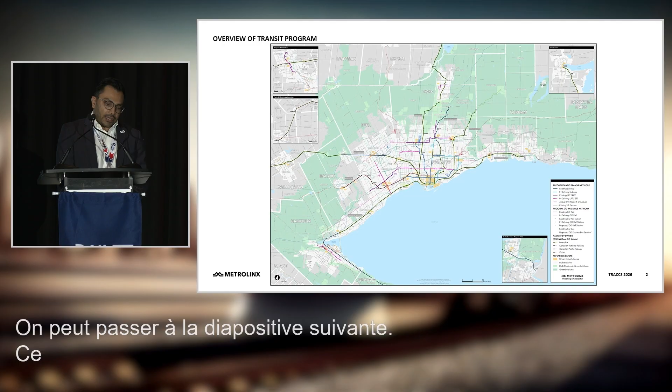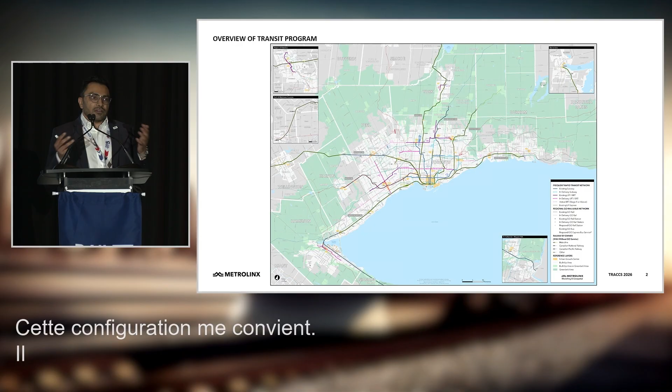This is a really interesting slide, and one that humbles me. If anyone's been in my office, I have a 10 by 10 printout of this slide on my wall, and I look at it most days. My boss was up here a few minutes ago talking about how unreasonable this build-out looks—for me, it feels generational. Many of us are here because we enjoy seeing projects we can touch and feel, and looking at this map and a vision into our future is humbling.

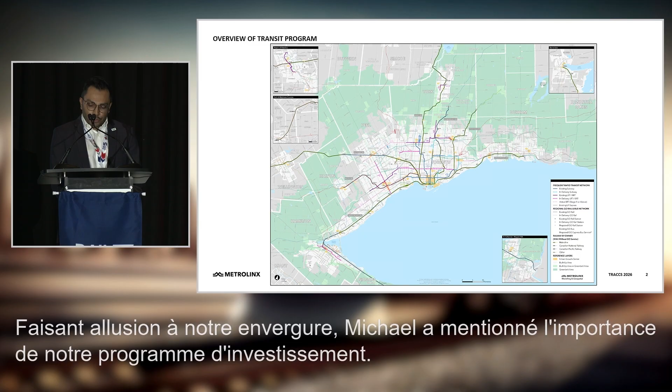There are three things I want to talk about before getting into specifics on how we're shaping our pipeline. One, leaning into our scale. Michael mentioned how large our capital program is—the largest transit program in the world. To unlock that, we need to partner with the best in the world while also developing some of our own skills.

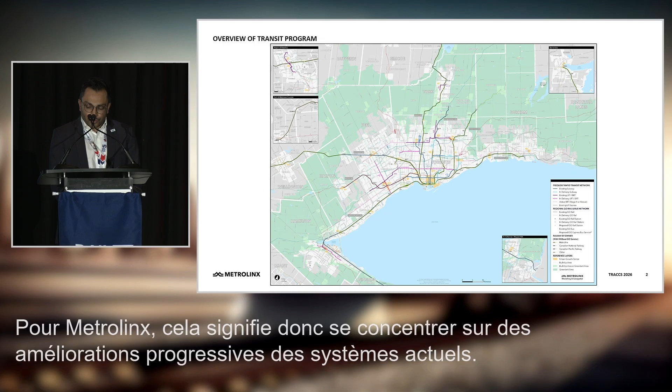Second, we need to refocus on customer experience. For Metrolinx, this means focusing on incremental improvements to today's transit program while not losing sight of the generational impacts we're making through our capital projects. Third, developing our local capabilities in supply chain. I'll talk a bit more about the Ontario model, but this is something the Metrolinx executive team talks about a lot.

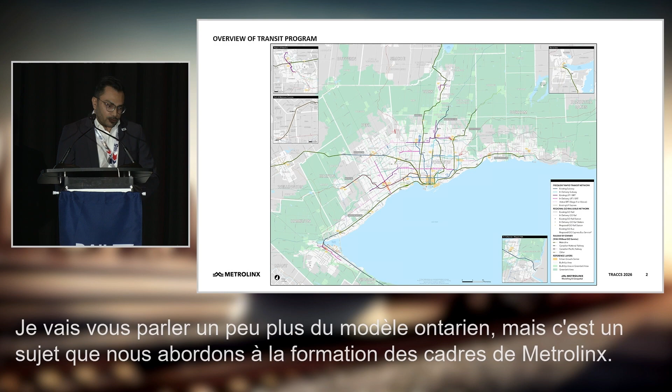So perhaps we can move to the next slide, and then one after that. What are some of the initiatives we're really focused on, that I'm driving the team on?

One, getting people moving quickly. Our communities continue to grow rapidly in a dispersed way, and oftentimes we're not delivering our station products in a context-specific and scaled manner. One initiative I'm really driving—and would appreciate industry's help with—is thinking about what the minimal viable product is. How do we scale stations fast? What's something repeatable, doable, and not complex, that we could adapt to where our community is growing? You'll see one example of this in what we're doing in Grimsby right now.

The second thing, as I alluded to earlier, is we find ourselves in a unique situation of trade uncertainty. Metrolinx is embracing this opportunity to think about how we adapt our delivery and partnership models to Buy Ontario. We obviously have trade agreements in place that we respect and work with, but it's important to us to think through, at this moment in Canada, how we make our supply chain strong, diverse, and resilient so we can continue to grow our local base of manufacturing and design capabilities.

Third, we're going to continue focusing on investment into our existing network. This means large commitments to state of good repair, both technological updates and capability updates. And then fourth...

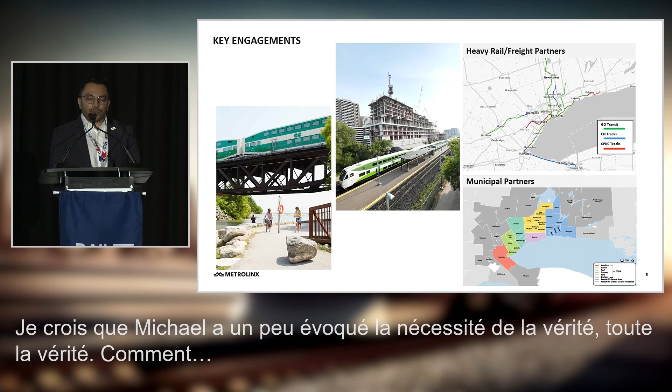So how are we engaging? I think Michael talked a little bit about just the need for the honest truth. How do we align incentives? How do we do better together? How do we get transit moving? I think that's important, and I think we've said a lot about that.

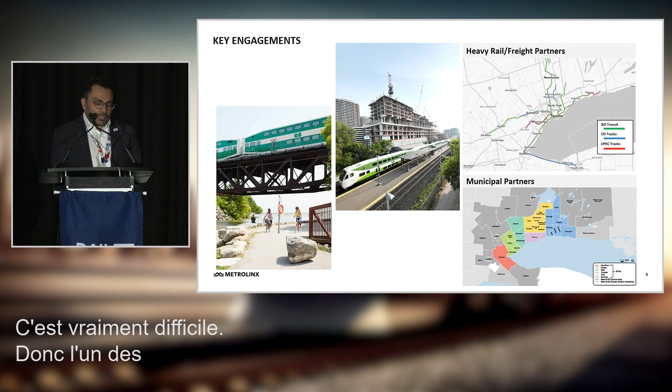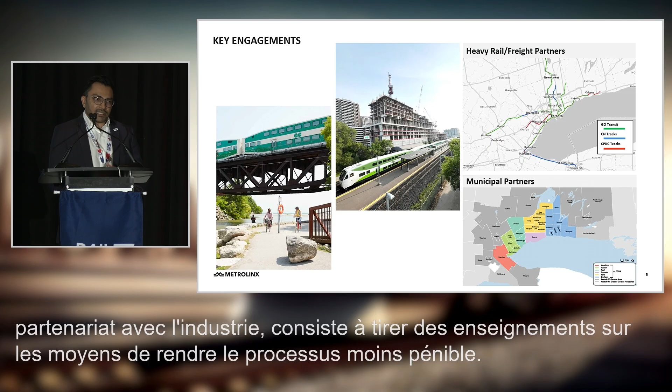The other thing I want to recognize is a lot of our partners are trying to build in active rail corridors. That's a really hard thing. So one of the initiatives I'm kicking off, hoping to partner with industry on, is really getting lessons learned on ways we can make it less painful, create more access, and make projects go more efficiently in building our rail corridors. Many of you will get pings from my team in your mailboxes reaching out for help, and hopefully the development of a more streamlined, thoughtful process.

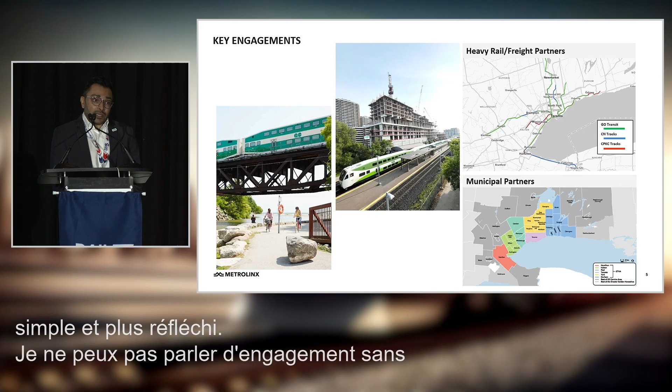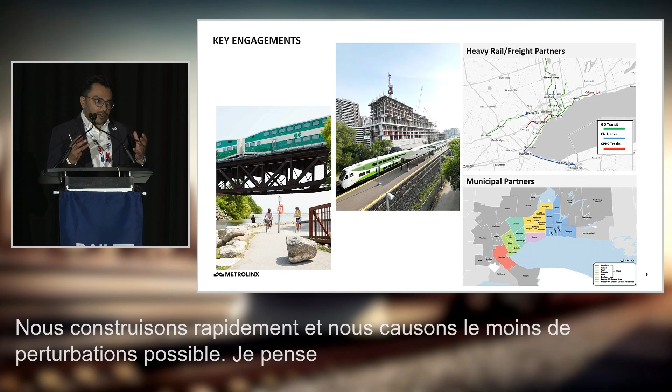I can't talk about engagement without talking about our municipal partners. They are crucial to all the things we do. Metrolinx is really focused on continuing collaboration to make sure we're building things fast, building things quickly, and causing the minimal amount of disruption. I think that is really evident. Some of the pain points I've heard from many of you in this room is that there's friction, and we're hoping to try and ease some of that friction.

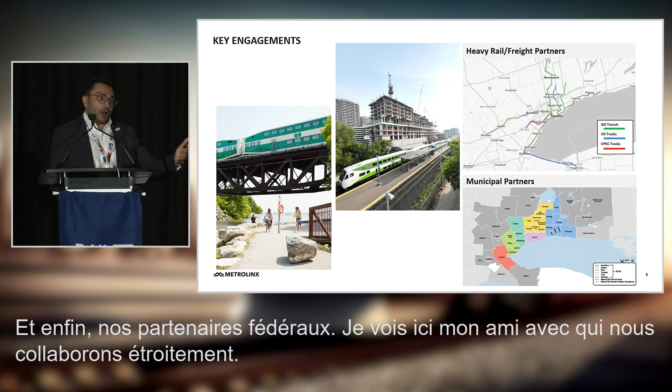And then finally, our federal partners. I see my friend over here, who we collaborate closely with on high-speed rail and other things, continuing to get lessons learned, using industry knowledge and best practice, to make sure we're building the right things, using the right technologies, and thinking about what our 10 to 15 to 20-year pipeline looks like.

Maybe I'll end on a couple of specific areas that may be interesting to this group. As we support the evolution of our GO program, this summer we're coming out with a large omnibus package of professional services. This is to help us continue to get the skills and capacity to support the future delivery of the GO expansion program, and importantly, the upskilling of our staff.

Second, Michael talked about the future of GO requiring 1,400 new rail cars, specifically EMUs. That's a huge number. To support this, we're going to be coming to market shortly, asking for help thinking through how best to deliver that, in addition to expanding our bus fleet to meet future needs, but also to create resiliency today.

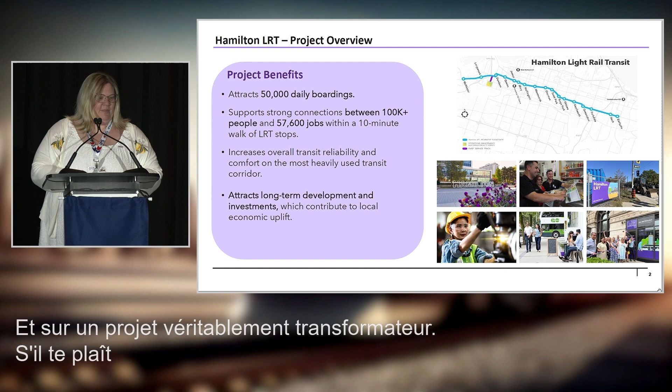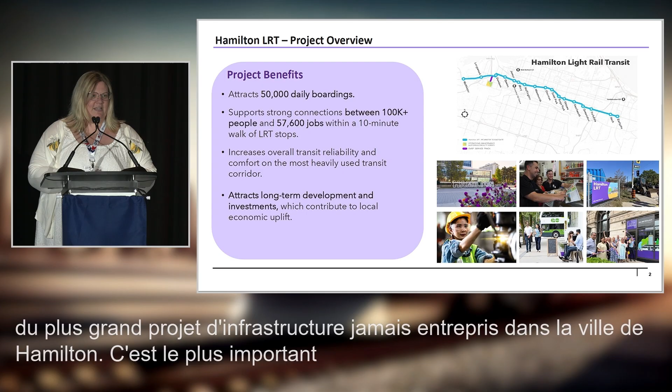Hamilton LRT is a 14-kilometer, 17-stop, fully at-grade LRT system. There is, however, an underpass under CPKC, but this is the largest infrastructure project that has ever hit the city of Hamilton. It's the biggest investment not only in transit, but in full urban renewal of the corridor in downtown Hamilton.

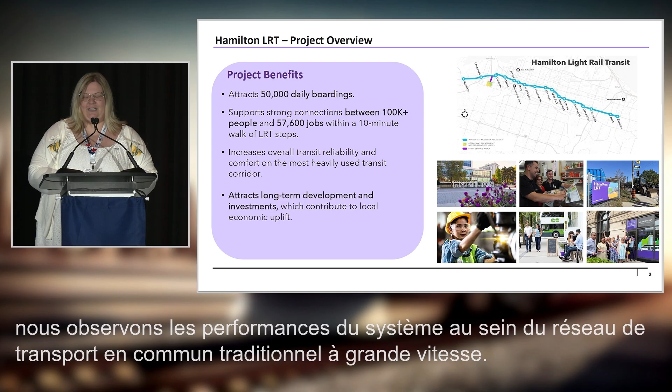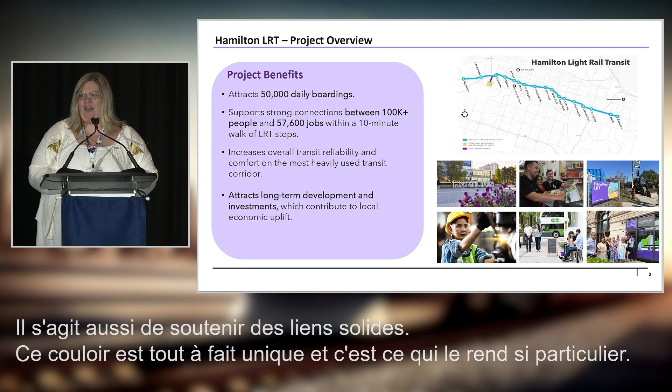Some of the benefits related to this project include increasing daily boardings to over 50,000, and we're actually updating our modeling now to see how the system has performed in the HSR traditional transit network that's currently there today. We expect we may even exceed that. It's also about supporting strong connections. This corridor is unique in that it's not just a commuter corridor - we see a lot of activity throughout, anchored by universities, schools, social services, activities, stadiums, new arenas, etc. There are a lot of strong connections being created as part of this project. It's also about creating overall reliability - this is currently the busiest transit corridor in Hamilton right now.

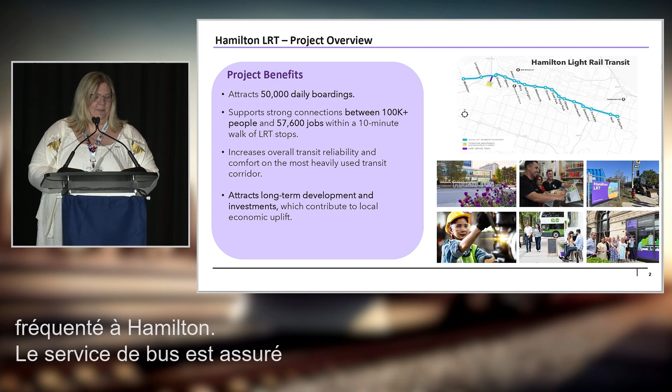The bus service is operating so frequently and still leaving people behind. So capacity, reliability, and comfort that LRT will provide is a key component of this project.

Another one is this is around community building. It's not just about the train, it's not just about all of the new utilities and civil components of the project that are coming around, but how do we attract long-term development and investments?

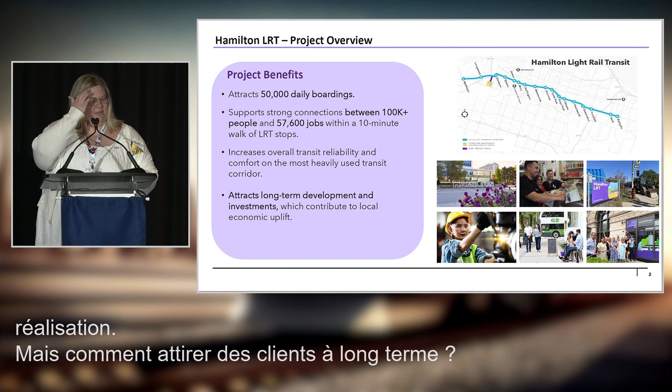So this is our planned packaging strategy. We've had different procurements on Hamilton LRT in the past. Where we are right now, however, is there are 2 main packages of work supported by advanced enabling works.

Our Enabling Works package has been underway since 2023. There's been a lot of great work. We've partnered with our City of Hamilton municipal friends, as well as Alectra, Bell, and other utility companies. This is getting a lot of the main transmission lines off of the corridor to allow for space in a very narrow corridor that is the downtown Hamilton area to allow for LRT.

Package 1 is our Civil Works and Utility Works package. This was in the market from 2024 through to earlier this year. So we're happy to announce that we have entered into an alliance partnership with AECON and a design joint venture with Hatch, Systra, and Egis.

We're a few months into our alliance, still working on some of the foundational pieces of our schedule for the development phase for the alliance model, and looking forward to starting to engage the market as we get into our early works, our market engagement for costing, and into full implementation.

We also have package 2, which will be starting ideally within the next year or 2. There are options on the table that are currently being evaluated. We're looking forward to doing some market engagement in the near future in terms of how we deliver the remainder of the work. Package 2 is related to our stops, rails, and systems.

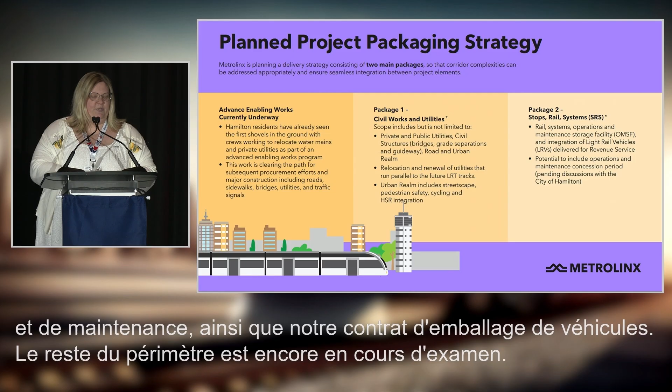It's also related to our operations and maintenance contract, as well as our vehicle contract. Packaging in terms of all of the remainder of the scope is still under review and looking for market engagement in the near future in order to make our final decision on how to deliver those portions.

Next, please. Oh, I forgot I had this slide.

So, as I said, we're currently in our development phase. This is really around looking at how we are reducing risk and progressing our designs and construction methodologies into the implementation phase. As I said, we're only a few months into it.

We've been working on our target cost advancement, value management opportunities, and we've also included looking at the ongoing development of the SRS components of the project.

As we've all learned from a lot of our other projects in this region and around the world, integration and thinking around the end in sight is really important in ensuring that what we're doing now in terms of civil and utilities is de-risked and it doesn't result in rework in future packages.

We're going to continue to advance our enabling works. We're continuing to do a lot of due diligence work in the corridor, and again, looking forward to getting more activity happening with this project starting this summer.

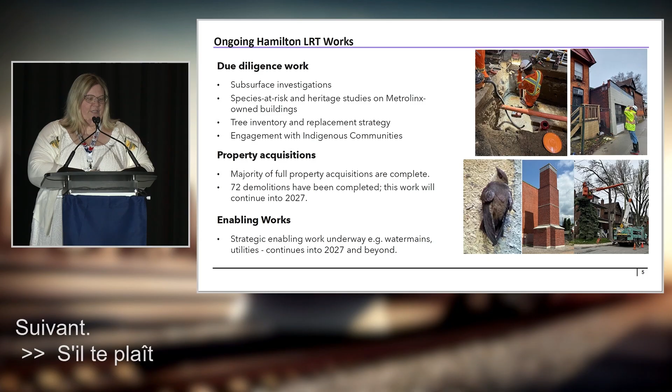Some of the due diligence work that we've done to date and are continuing to do are subsurface investigations. There has been a significant amount of environmental, cultural heritage, and archaeological work. This is an old city. We did one of the first stage 4 archaeological assessments with our organization, where we found over 1,000 artifacts, none of which were actually deemed to be of interest, however, an interesting exercise nonetheless.

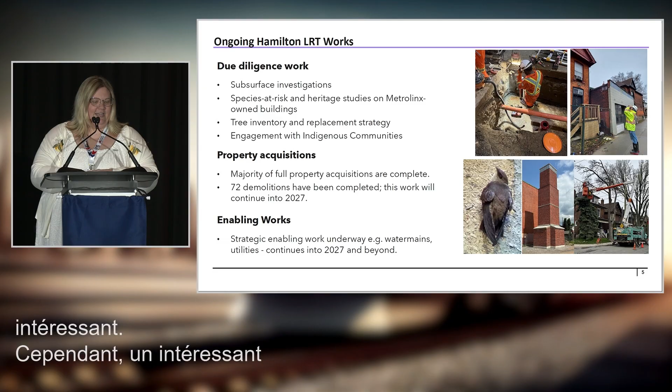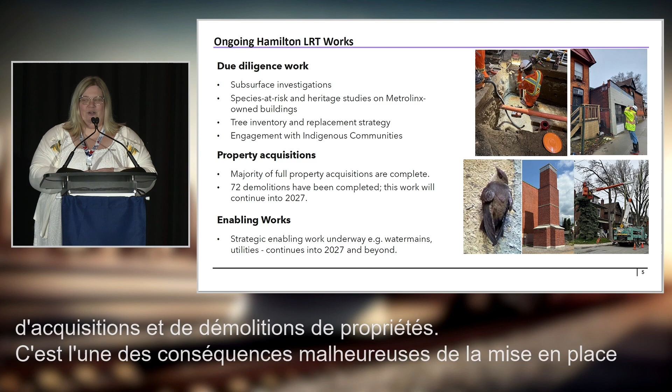We've also had to do a significant amount of property acquisition and property demolition. This is one of the unfortunate consequences of putting an LRT in an old, narrow corridor. We've completed 72 demolitions to date. There will be over 100 by the time the project is complete.

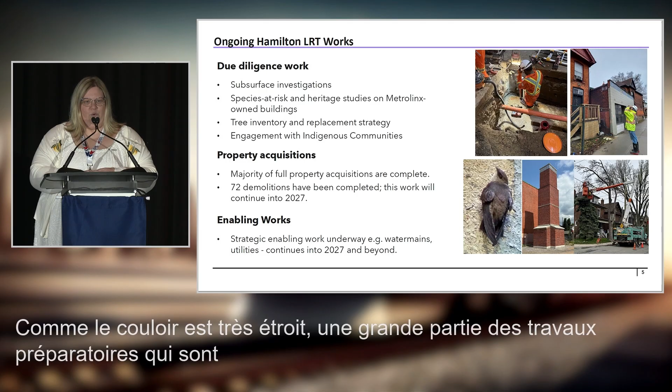And in our enabling works, as I said, it's been strategic in terms of ensuring that we're moving a lot of the main services off the corridor. Because the corridor is so narrow, a lot of the enabling works that are possible on the corridor require a little bit more design and certainty before we progress.

Why are we relocating utilities? A couple different reasons. One, it's really about getting that utility-free zone for LRT, ensuring that we have a reliable service if the high density of utilities in this corridor need to be maintained and disrupted.

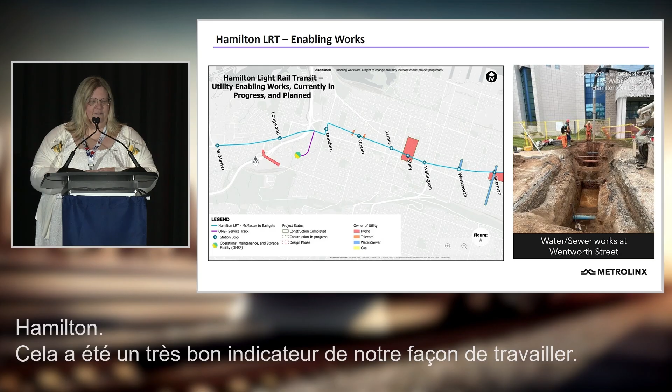If you go to the next slide, please, this will show some of the examples of the work that we've done thus far. I'd really like to recognize our partners in the enabling works that have happened, particularly the City of Hamilton. It's been a really good indication of how we work together because they've achieved everything on time and under budget.

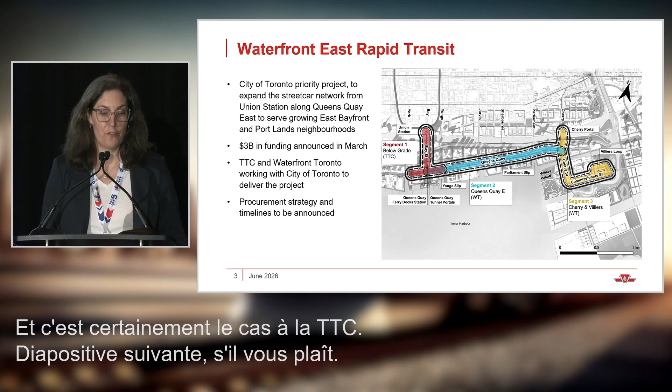Next slide, please. So, Waterfront East Rapid Transit. This is definitely the number one reason why people are calling me these days. Very exciting announcement back in March for this project of about $3 billion worth of funding.

So what I will share today is this is going to be a jointly delivered project between the City of Toronto, Waterfront Toronto, and TTC. We are working through how we are going to deliver that and how we are going to manage the deliverables that we have into the $3 billion funding envelope as well.

So stay tuned. I don't have a large amount of details to share today, but do stay tuned, as this is certainly a very exciting improvement to this part of the City of Toronto.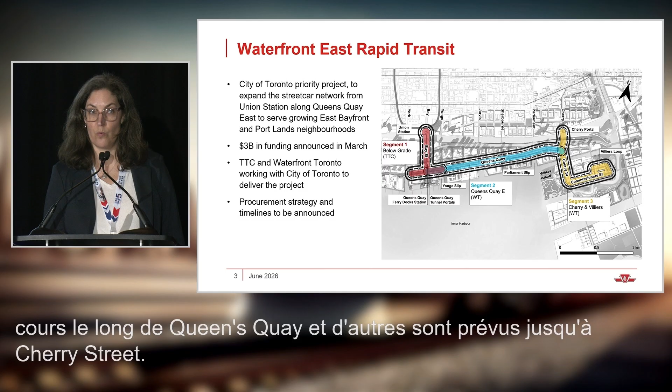As you know, if you're a resident or have traveled in this area, a huge amount of development already happening along Queen's Quay, and more to come through to Cherry Street and Commissioners and the new development in the Port Lands as well. So a lot of opportunity here. Stay tuned and we will share more as we have details on how this will be delivered.

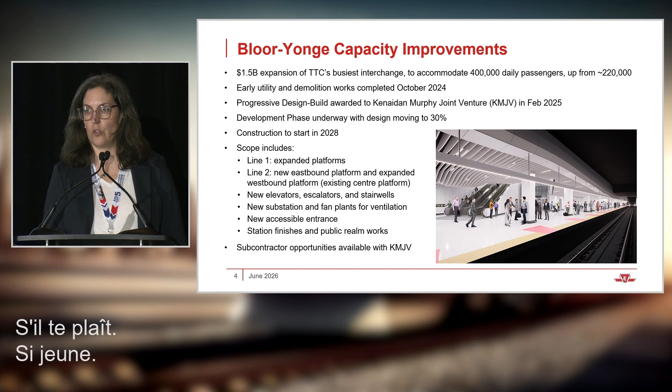Early works are progressing though as well later this year, and you'll hear more about that. Next slide, please. So Bloor-Yonge, this is currently TTC's largest single project and contract, infrastructure contract, I should say, which is $1.5 billion to expand our most important interchange at Bloor-Yonge.

This is in development phase right now. We do have a partner in Kenaidan Murphy joint venture and Arup, we're about halfway through development phase on that, hoping to reach our target price by the end of 2027.

There certainly will be subcontractor opportunities as that work gets defined. We're about halfway through and seeing great results through the progressive design build development phase, finding value engineering and ways to improve delivery of this important interchange expansion in a very busy part of the city.

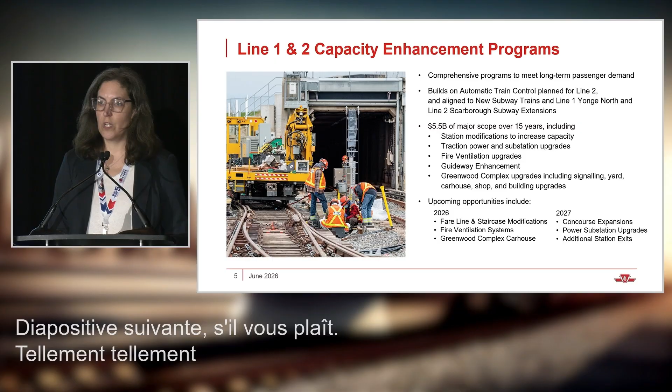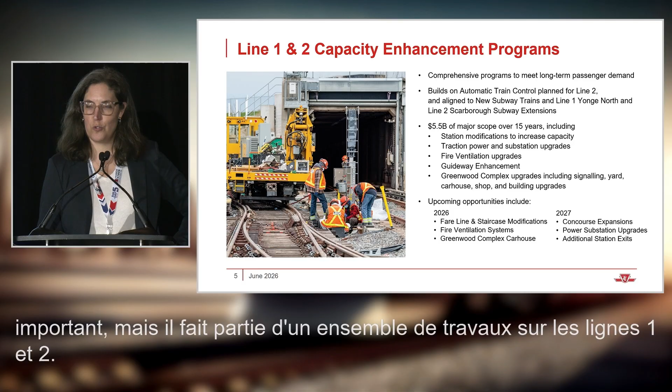Speaking of expansion overall, Bloor-Yonge is the largest single project, but really part of a portfolio of works on both Line 1 and Line 2. This existing infrastructure moves many hundreds of thousands of people a day. There's a huge amount of development happening, particularly along Line 1, but also along Line 2, and we anticipate a large increase in ridership along both lines over the coming years.

In order to accommodate that, we need to improve and modernize our existing systems. On Line 2, we're also moving forward with ATC to improve headways and increase our capacity to move people. That's ultimately what we're doing, in response to the anticipated housing and ridership growth along Line 1 and Line 2.

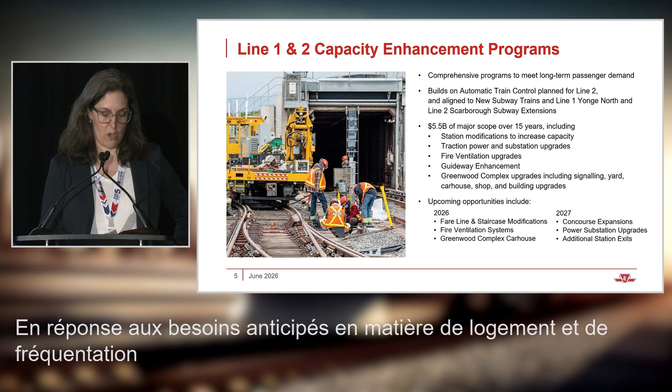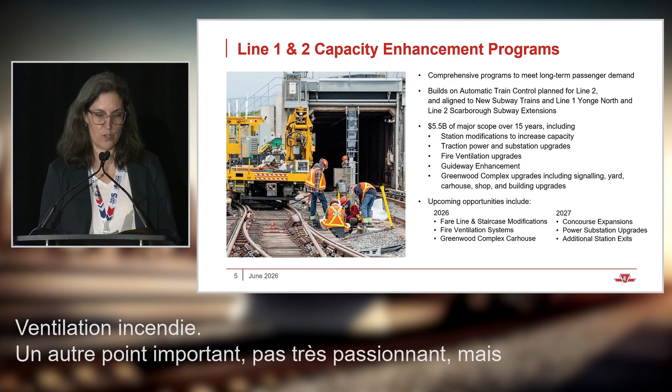In addition to station upgrades like Bloor-Yonge and other locations, this is really a suite of works, mostly individual packages. Traction power upgrades are hugely important to increase capacity on the line. Fire ventilation is another important, not very exciting, but necessary improvement so we can put more trains through. And our maintenance facilities also need to upgrade and expand to meet the requirements of our growing system.

As I mentioned on Line 2, we're already in procurement, in implementation, with our supplier Alstom, for 55 new subway trains. These will power Line 2 and replace our existing T1s that have been the workhorse there for many years. This is an exciting upgrade for us. We're in early stages with Alstom but looking forward to those coming out over the next couple of years. Talk to Alstom about opportunities for supply to those new subway trains as they get designed and engineered.

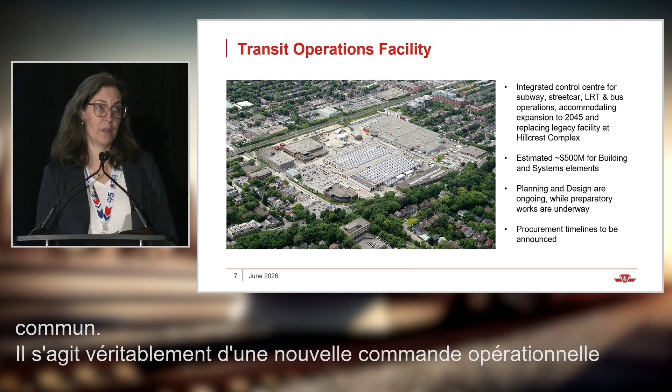One other single project I wanted to call out is what we're calling our transit operations facility. This is really a new operational control center, replacing our existing one, to bring us into a modern state of systems and facility for basically the brain of operational control at TTC. This is currently in design.

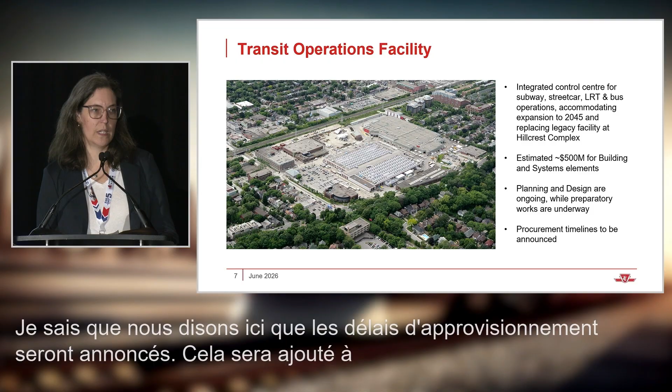Procurement timelines are to be announced, and it will be added to our pipeline shortly. We anticipate planning to go out with the construction management at risk model, aiming for later this year or early next. This is about a $500 million project through building and systems, and will be a key cornerstone of TTC's operational control in the future.

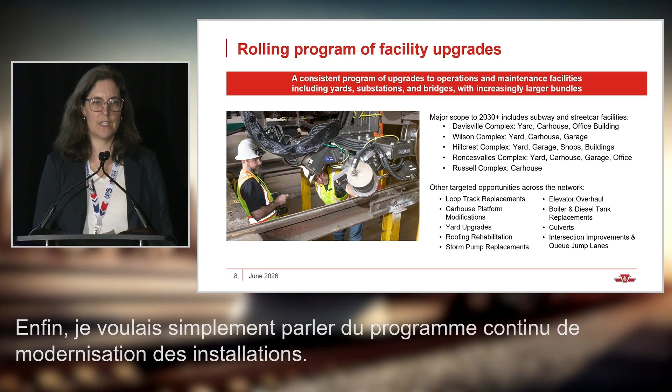Lastly, I wanted to talk about the rolling program of facility upgrades. TTC right now partners with Metrolinx in many ways in expanding our system, expanding our lines, both Line 1, Line 2, and ultimately Line 5. So the expansion part is really achieved in partnership, but we do have a rolling program of facility upgrades. As you can imagine, we are a legacy system—our subway lines were built many decades ago.

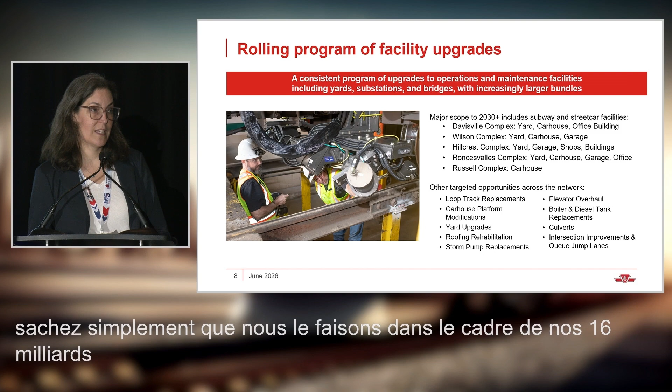I won't rhyme off everything on the slide here, but just know that as part of our $16 billion program over the next 10 years, that includes a rolling set of projects and work packages that come out constantly, so we can keep our existing service and assets in the state of good repair that our customers need them to be in.

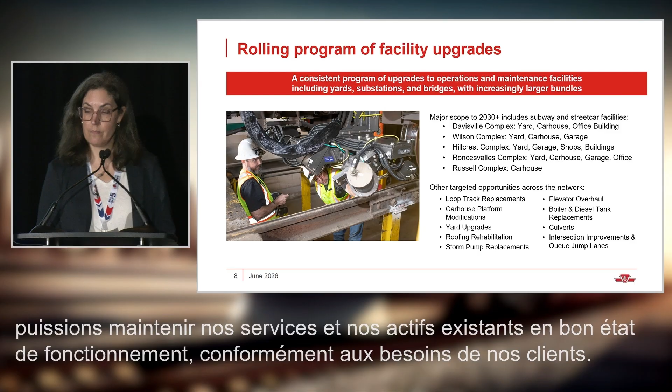This is where we have everything noted going forward. It's a continuous updating cycle, so please do return frequently to see new and increased opportunities. Everything is posted on MERX publicly, so that's easy to find.

Maybe I'll close by saying that, like last year, I was here trying to increase engagement with the market. I know TTC historically hasn't taken as active a role in that, but I certainly am very keen to. I've been there 18 months now, trying very much to ensure we are partnering with our supply chain as much as possible to do great work together.

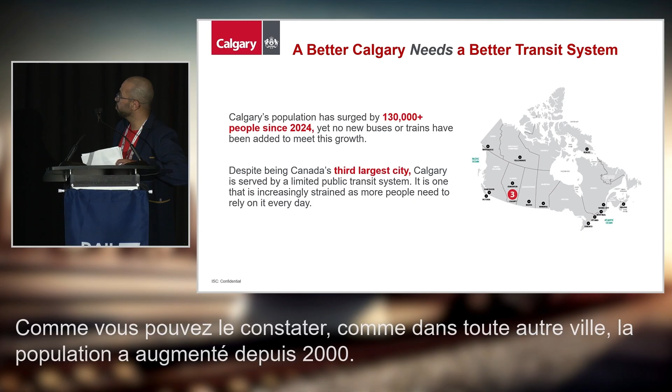Trains run every 10 minutes for at least 15 hours daily. But the only problem is only 10% of Calgarians live within walkable distance, and 30% of jobs are within walkable distance. As with any other city, there's been an increase in population since 2024, yet no new buses or trains have been added to support this growth. Despite Calgary being Canada's third largest city, it's been limited by a transit system that's increasingly strained as more people rely on it.

Next slide please. This is the first one, the Blue Line Northeast extension. I'm hoping you guys are familiar with the city and these locations. The project is being delivered in two different stages. The first is from Saddletowne, which is our last station on the Blue Line, going up to 88th Ave, then up to Country Hills. These are two proposed new stations that will be added for this extension.

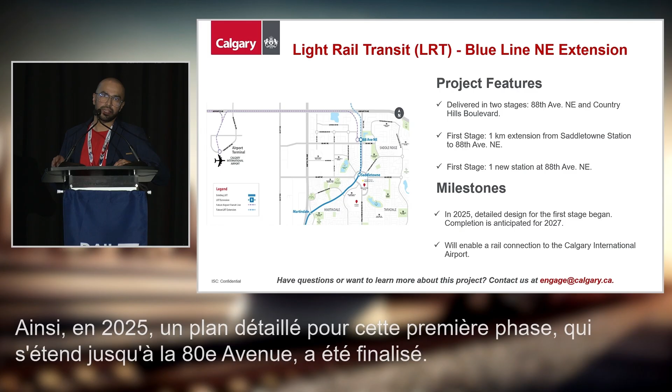So in 2025, a detailed design for this first phase up to 88th Ave has been completed and has actually started, with anticipation for 2027. The extension will not just improve access to northeast communities, but will also enable a connection to the future Airport Connect.

Next slide please. The airport transit connection will be a future link between the new Green Line and the Blue Line extension. This project is very dependent on the extension of the Blue Line to 88th Ave, and this will be an addition to that.

In 2025, a study was completed, and a detailed design for the segment from the airport to the Blue Line is anticipated in 2026. Once this project is implemented, it will help a lot of travelers move back and forth from the Calgary International Airport, and also support enhanced access between downtown and the airport.

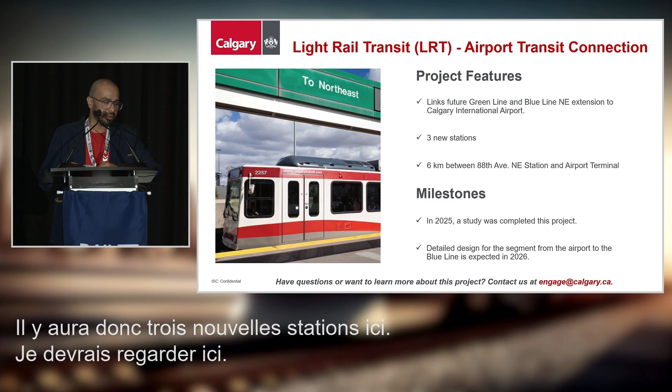There will be 3 new stations here, spanning 6 kilometers between 88th Ave Northeast Station and the Airport Terminal. As I said, this will be a link between the future Green Line and the Blue Line Northeast section. Next slide please.

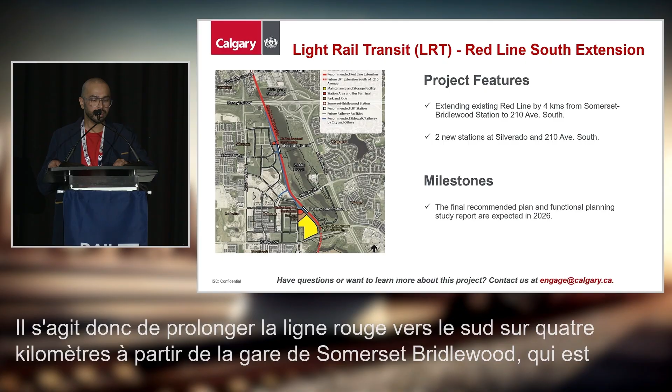Okay, so this is the Red Line South extension. This is extending the Red Line towards the south, 4 kilometers from Somerset Bridlewood Station, which is our last station currently, to 210 Avenue South, which will be a new station. So there will be 2 stations added, at Silverado and 210 South.

The Red Line is one of our busiest C-trains and plays an important role in supporting the rapid growth of South Calgary. The project includes 2 new stations, as mentioned, and there will be a maintenance storage facility at 210 Avenue South.

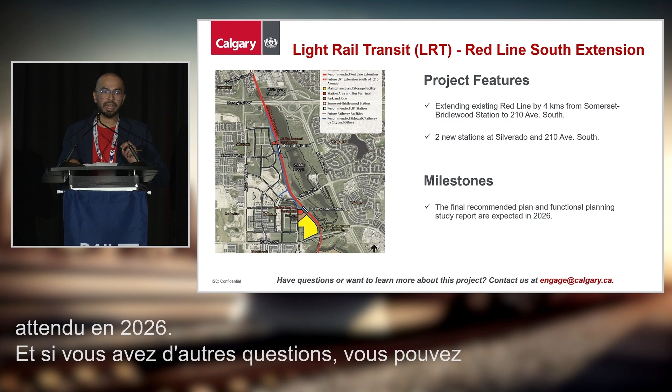The extension project is projected to serve an estimated 90,000 residents by 2048, improving connectivity between downtown and the southern communities. This is still in the functional study phase, and the report is expected in 2026. If you have any further questions, you can always contact us at engage@calgary.ca on any of these projects.

Next slide, please. This is where I'll let Shaq talk about this more, the Green Line. We're gonna go in as a tag team here, so you guys get a 2-for-1 deal from Calgary here, as if you asked for it.

As Vinay touched on, the red and blue lines are our current workhorse lines. The Green Line is a vision to add a 3rd rail transit line connecting all the way, with its full vision expecting to stretch 46 kilometers from Seton in the deep southeast all the way to 160th Avenue in the north. The new line will not interconnect with the existing red and blue lines, and it's serviced by new low-floor trains on all new separate right-of-way.

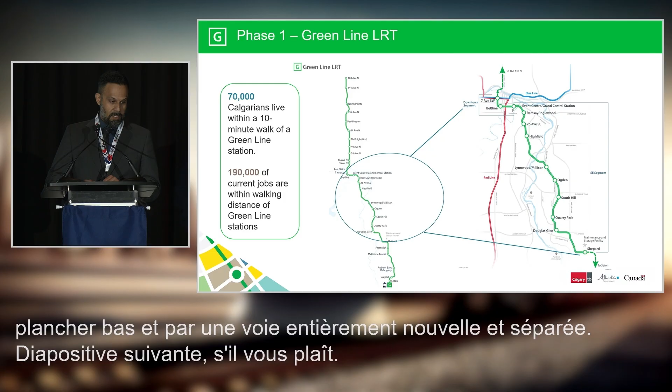The vision is being realized in multiple phases. The first phase is effectively from downtown to Shepard, and those of you familiar with the project know that the saga of the downtown is ongoing between the multiple orders of government. We are still taking a look at potential options for working through downtown.

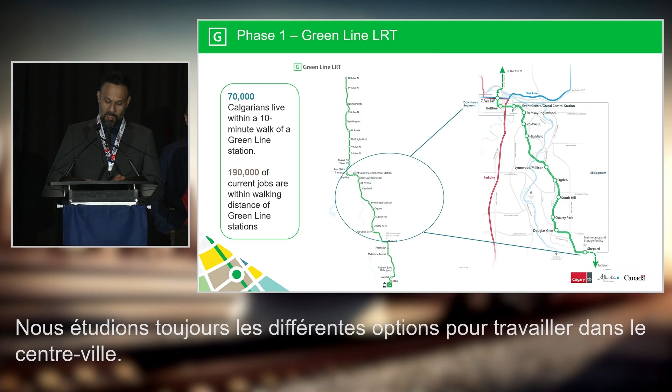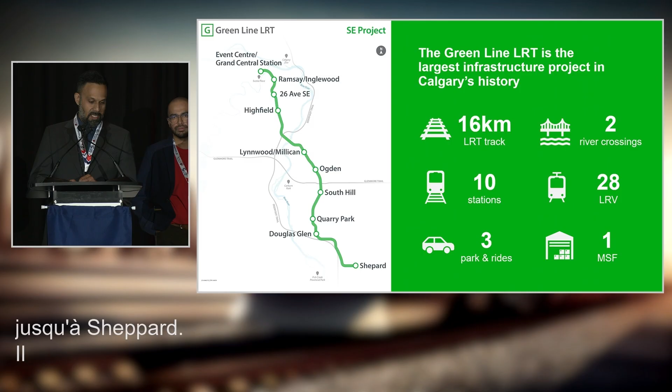What is currently being developed is on the next slide here, which is the southeast part of the program. This particular part stretches from the event center, just outside the southeast corner of downtown Calgary, all the way down to Shepard. It includes 16 kilometers of dual track LRT, including all systems such as traction, power, and signals, 2 river crossings, 10 stations, 28 LRVs, 1 MSF located at the Shepard site, and 3 park and rides.

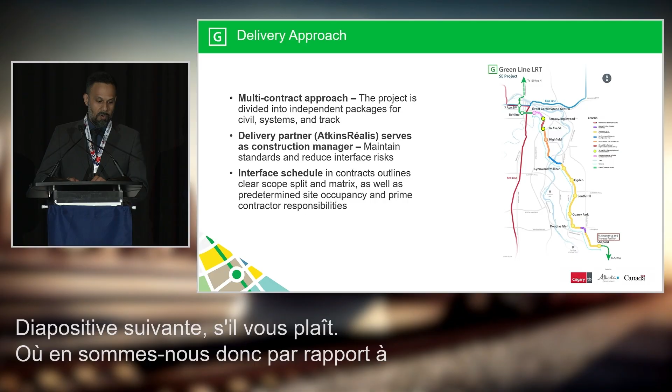So where are we in terms of procurement right now? The program was originally set out as a single DBF. Roughly in 2024, the City of Calgary pivoted to a multi-contract approach. That strategy is being supported by our delivery partner, AtkinsRéalis, who is obviously one of the sponsors here today.

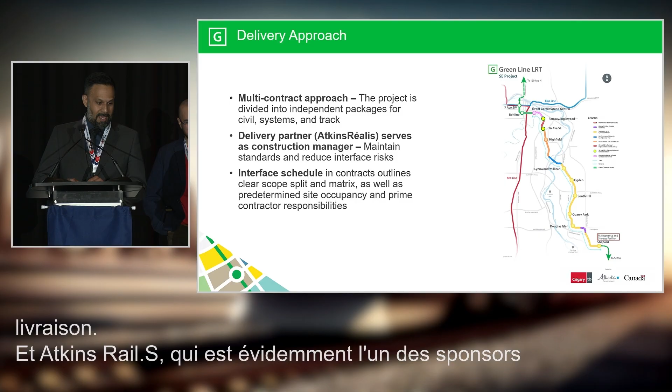These are basically broken out based on the map you see there, as we refer to the next set of sections. So where are we in terms of procurement right now? These are our currently underway projects: the maintenance and storage facility grading, building foundation, and utilities are currently underway.

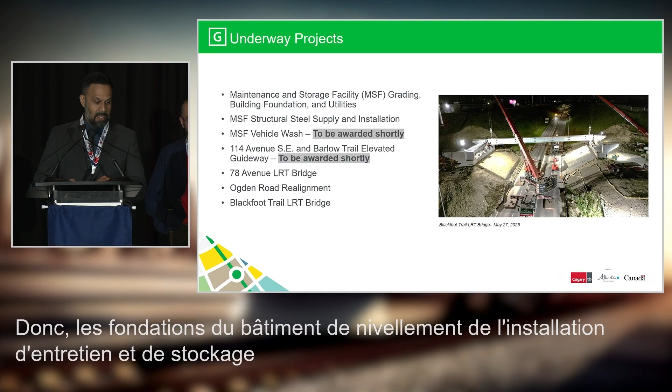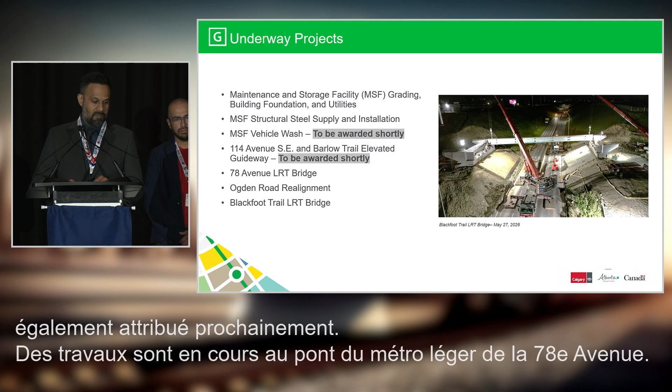The MSF structural steel was recently awarded. The MSF vehicle wash should be awarded shortly. The 114th Avenue to Barlow elevated guideway will be awarded shortly as well. Ongoing works are at the 78th Avenue LRT Bridge, the Ogden Road realignment, and Blackfoot Trail LRT Bridge. So we are very much shovels in the ground and in the midst of construction right now.

Okay, we'll step over to the next slide: active and upcoming procurements. Those marked with asterisks, referring to the previous slide, are only tied to those who are pre-qualified, and those pre-qualified parties are the only ones allowed to bid on those with the asterisk.

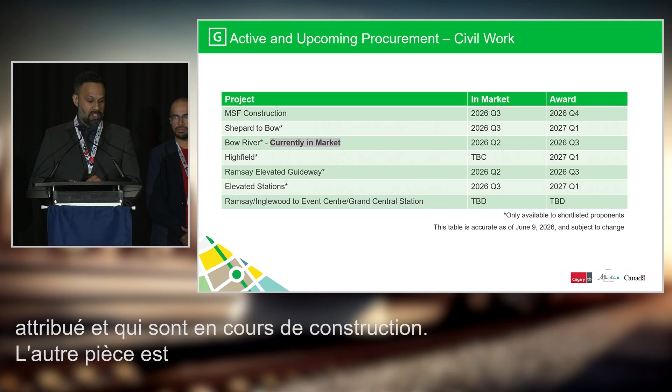The only exception that will be brought to the open market is the package for the MSF construction—that's the actual building facility, not including the structural steel and foundations package already awarded and under construction. The other piece is the connection into downtown, which is the Ramsay Inglewood Station to Event Center and Grand Central Station area.

So that will also be open to the full market there.

We currently have an RFPQ out in the market for the signaling and train control system. I believe that is to close in July. Our RFP for signaling and train control will then follow shortly thereafter and will only be issued to those who've been successful through the RFPQ process.

Our wheel truing machines are currently slated for later part of Q2, which we're running out of very quickly here, as is our MSF paint booth. The other major projects coming out, packages, will be for the traction power and communication systems, looking at Q3 of 2026, and a track package for Q3 of 2026 as well too.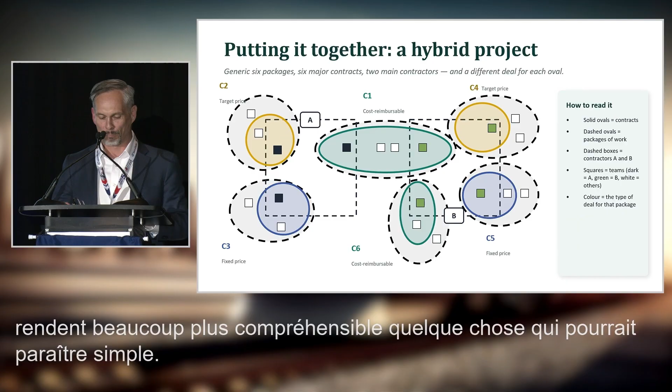What I've been trying to do is create visualizations that make something that might be simple much more comprehensible, but piece together visualizations that help people understand how the overall project, the overall line, is being delivered. This is a generic sketch - I'll show you a more project-specific sketch later. I was trying to think about different contractors working on the same project, through different work packages, different contracts, different contract models. That's the level of complexity we're faced with when we don't deliver a whole project under what I referred to earlier as a mega contract.

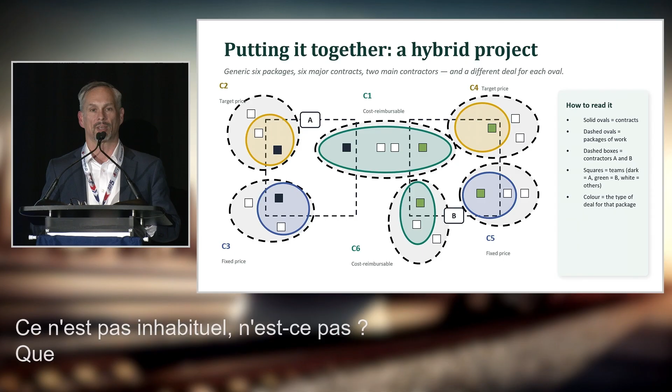To describe this visualization, I'd start in the top left. Solid colored ovals refer to contracts - the yellow circle in the top left would be a contract. The dashed line, which shows up better in the slide, is a work package, so you can see a work package can be larger than any specific contract. There are a number of early works, advanced works, perhaps utility relocations that happen within a work package but are done by the owner in advance of the major contract executed for delivery of that scope. That's why you see a difference in some areas between the dashed circles and solid circles. Within the solid circles, different teams from different contractors mobilize to deliver that scope. I've got examples of two teams from two different contractors - the one in the center, the large green oval, has four teams from four contractors. That's not unusual - we see joint ventures of four or five companies participating, down to single companies.

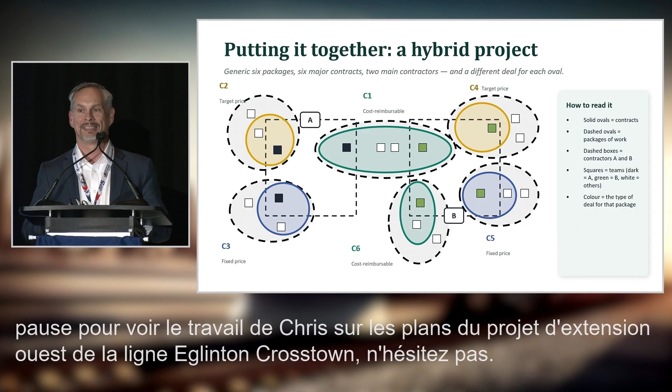I took out my pencils, highlighters, and crayons a couple weekends ago and tried to create a project-specific version of this generic hybrid project illustration. It's far too complicated to put on the slide, but I have it with me if anybody wants to approach me in the hallway or on a break to see my handiwork trying to draw that up for the Eglinton Crosstown West Extension Project. A little messy - I'm sure Claude or ChatGPT or Copilot could help me create a better version in the future. But I did try to create a simplified version later in this deck.

So the real example I was working to put together is the Eglinton Crosstown Line 5. Nineteen kilometers is what's in service today between Kennedy and Mount Dennis. The Eglinton Crosstown West Extension is in construction - if you drive along Eglinton, you won't see the tunnels that have been constructed or are under construction, but you will see the elevated guideway through the Humber River Valley rising from the ground.

Over five different contract models are being used to deliver that line. As I mentioned earlier, ECWE, like the ECLRT, used advanced tunnel contracts to get tunneling started, tunnel boring machines in the ground, even before we had advanced past the reference concept design for some elements of the project like the stations and facilities.

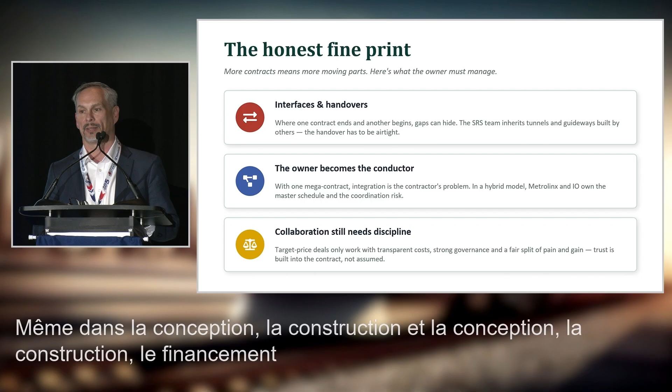Collaboration needs discipline. We've had a lot of success to date on the Eglinton Crosstown West Extension project, even in the design build and design build finance contracts we delivered. I would tell folks that is because we are able to implement there a high level of collaboration with our contractors and their designers and our project team, regardless of contract model.

We should only be better at that, and we should only be more consistent in that through the collaborative contract models we're now using for major packages. So I don't believe it's impossible in one and only possible in the other, but I think as an industry, let's look to adopt those behaviors and those practices that are instrumental in creating high levels of collaboration, strong relationship building, high integrity, honesty, openness, being forthcoming, speaking plainly. All of those things, I think, regardless of project, regardless of contract model, are going to do us well to be successful together.

Last slide, next slide. All right, so maybe some key takeaways. I'm not sure if it'll resonate and leave a lasting impression, but you saw lots of ovals, lots of squares, lots of dash lines, solid lines, and little boxes, but that was an attempt to try to illustrate how we're often seeing now major projects disaggregated, how we're seeing different contract models applied in different work packages, often with overlapping contractors participating in more than one of those boxes.

Sometimes they're fixed price, sometimes they're target price, sometimes they're paid in a different way, or maybe have different terms and conditions, but we need to bring them all together, coordinate those interfaces, manage those handovers, and bring the project into operation, regardless of the contract models used in its delivery.

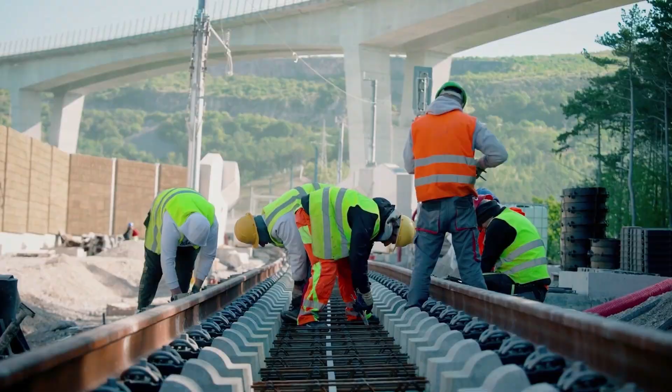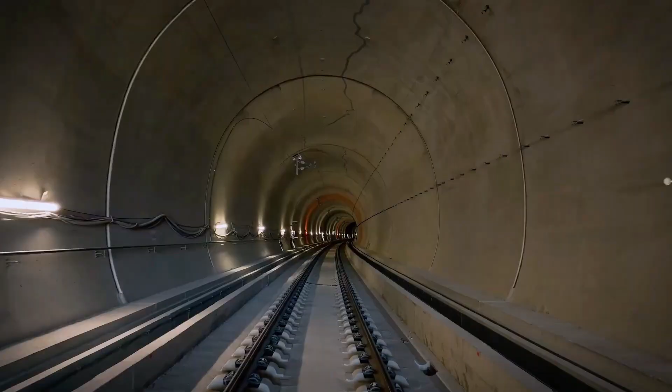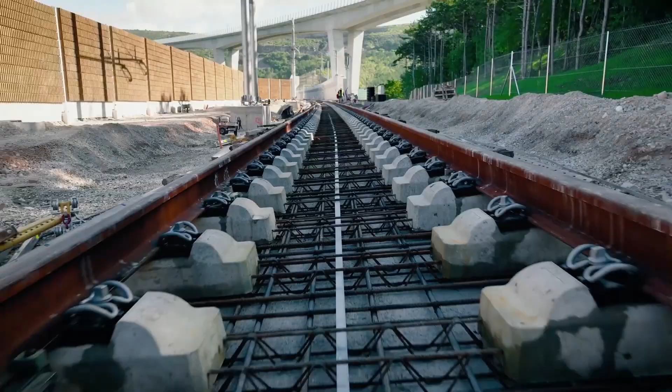The Slab Track project in Slovenia marks a major milestone. This will be a very crucial infrastructure project that will boost the railway in the whole country. This project focuses on building a new railway line from Divača to Koper, with a total length of 27 kilometers. It is a very complicated project. It runs over 3 major bridges and along 8 tunnels, the biggest one around 7 kilometers. RHEDA 2000 is a system optimized for exactly these applications. No system change, from turnout to the earthworks, bridges, or even tunnels. One consistent system.

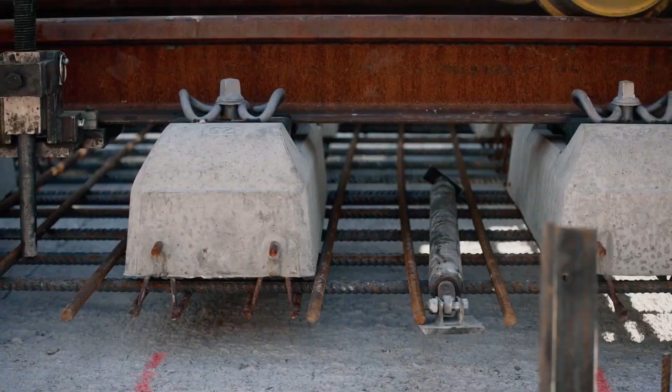We only can design the right solution if you understand the client's needs. RHEDA 2000 is a concrete-based system. We found a good balance between prefabrication and steps which are occurring on site by using small bi-block sleepers which are adjusted to the project needs. They are small, they are light, they are flexible. We focus on highly efficient workflows. First, we assess the equipment already available on site. Together with the client, we develop installation guidelines to avoid additional investment. In the end, this approach is significantly more cost-effective.

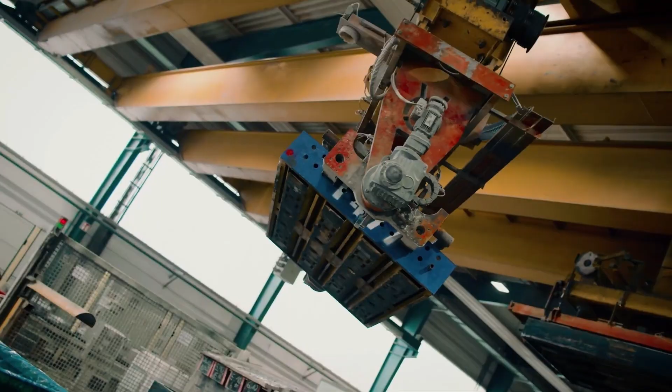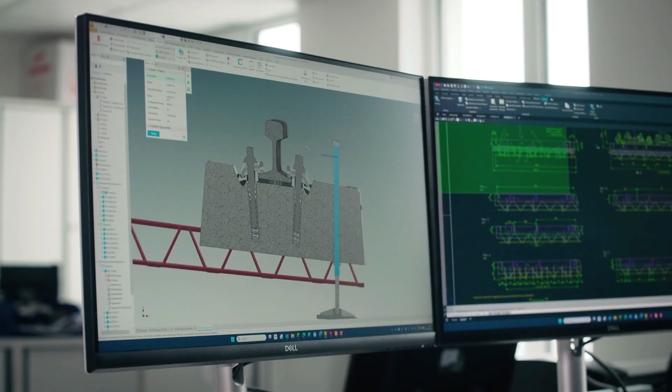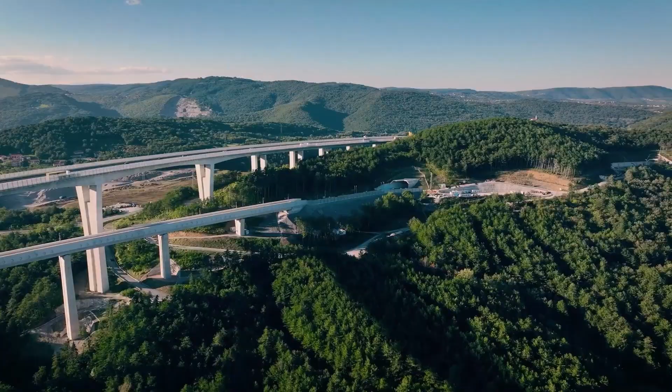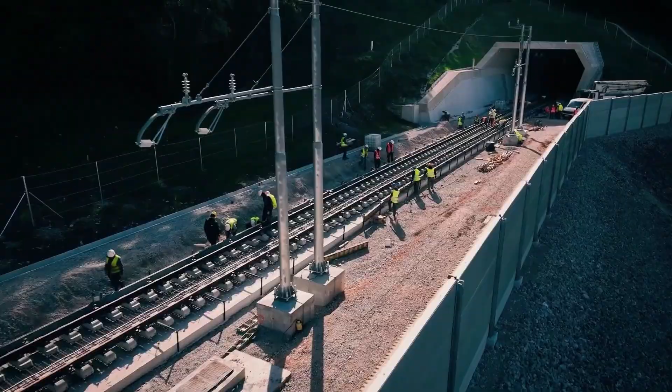We guarantee a service life of 60 years for the structural track elements. Minimal maintenance is our major benefit. There were no communication issues. All necessary information was communicated. Everything was delivered on time. Our aim is to transfer know-how to our local partners, because this, in the end, is the best combination, having a great system that is proven and adaptable, and having a very high-quality team behind it to support it.